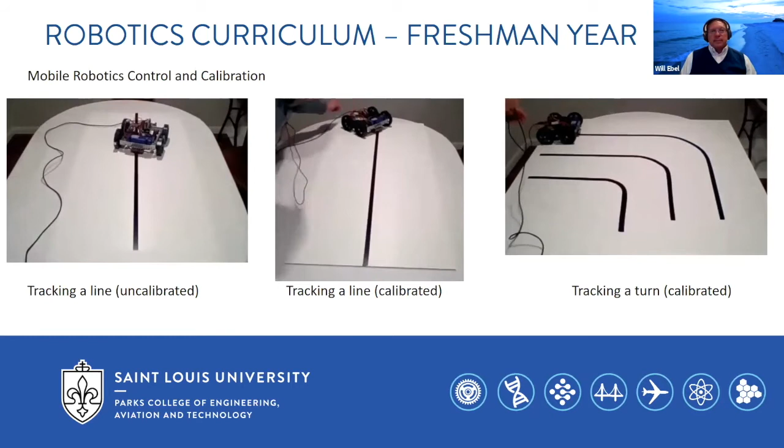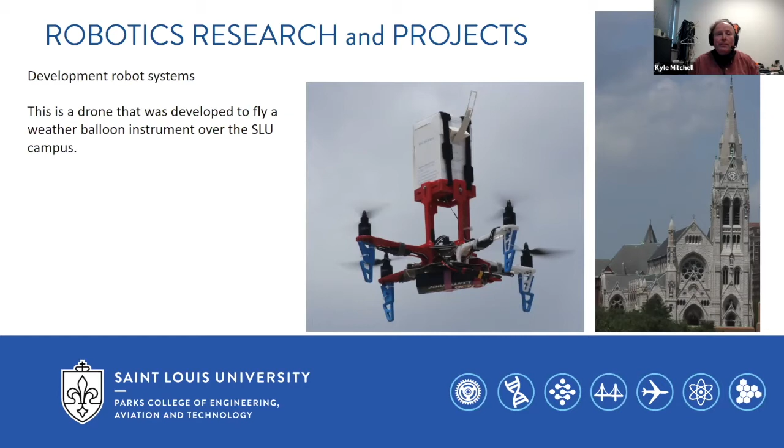We really want this to be something that we can turn loose with middle school and high school students, and other people throughout the country and world can come and experience what it's like to try to both program a stationary arm, but also operate a robot remotely. When you only have a single camera and a single point of view trying to tell you what your robot's doing, perspective gets to be really difficult. And that's something that, as we progress forward in technology and we enter this area of operation where a lot of things are going to be teleoperated, that's going to become something really important.

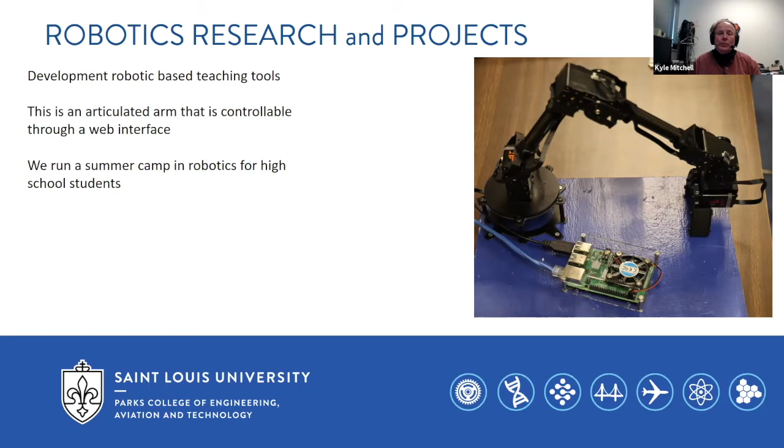Our students participate in a number of robot competitions. So in the electrical and computer engineering departments, we have a competition put on by our National Professional Society, the IEEE, where we build 1 foot by 1 foot cube robots to perform an autonomous task. Those tasks change every year. In the aerospace department, they build flying vehicles, autonomous flying vehicles, to do similar things. So AUVSI is another national organization. This time it's of autonomous vehicles.

These craft typically have to go into a field, find something, and report back something about it. Frequently that something is an injured person, and they have to report back the status of the injured person, or maybe they have to deliver a tracker to where the injured person is, or maybe deliver food and water. There's a number of ways they modify this, but it's all done from an aircraft that you just set down on the line, push the button, and walk away from, and it has to go do its own thing.

You'll notice a theme here around these collegiate projects that's a little bit different than the projects that are done at high school level, and that is this level of complete autonomy. And that's one of the things that you're gonna learn as you go through the computer science, computer engineering, electrical engineering portion of robotics, is how to give robots that level of autonomy where you can push a button and turn them loose and have some trust that they're going to go do what you ask them to do.

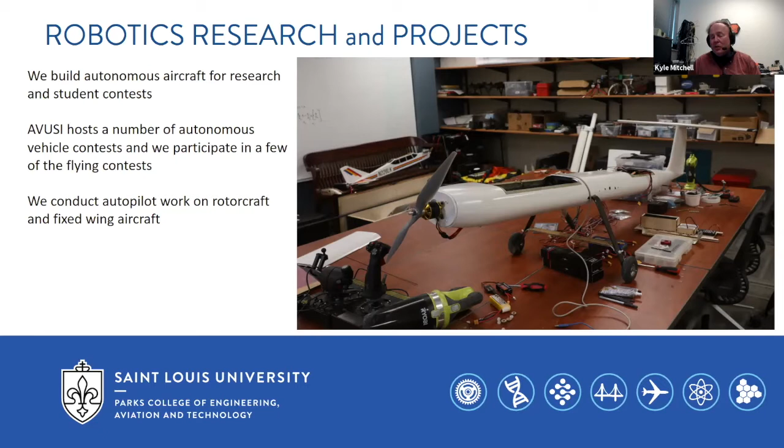So any of you that have flown a drone know that if you damage the propeller, the drone makes a strange noise because the propeller flutters. Well, that fluttering of the propeller makes the whole craft shake at that frequency. But if you damage any part of the substantial structure of this craft, the whole craft will shake a little bit differently. And by measuring that, we can characterize that damage.

And if we know what the damage is, we can program the autopilots to recognize that damage has occurred and do something differently. So a lot of the work that the aerospace people are doing, we're measuring data for them and getting them craft that they can do this vibrational analysis on. They're taking that data and building smarter autopilots.

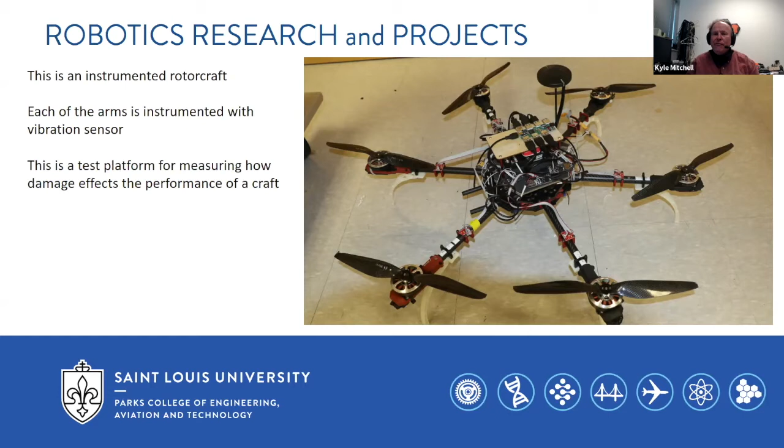So the aerospace people working on these drones, they're figuring out ways so that if they detect that a particular propeller has been damaged enough, they can turn that motor off so that it quits shaking the craft and then still put the craft on the ground in a controlled fashion. In other words, we can damage these crafts and they do not fall out of the sky like you've seen a lot of drones do.

and it has an Arduino processor board on the top, and a motor shield that lies on top of that. And below, although we can't see it, there are some line following sensors, functionally similar to the ones that you saw in the videos earlier on in this presentation. And what the robot needs to do is navigate a course,

and that course involves lines on paper. But the lines also contain symbols, and the symbols have to be detected, and they will tell the robot which direction it needs to turn when it comes to a fork. And the goal is to get the robot to start at some place and end up at some other place, and to correctly read the symbols and to be able to track the lines well.

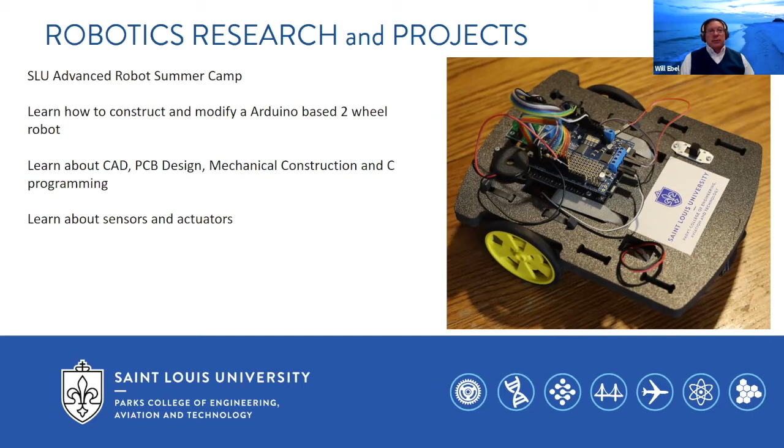We go through a lot of the specific algorithms. We talk about concepts involving programming, how you represent data in the Arduino program, and how you make use of that to achieve the functionality of the project that you're trying to achieve.

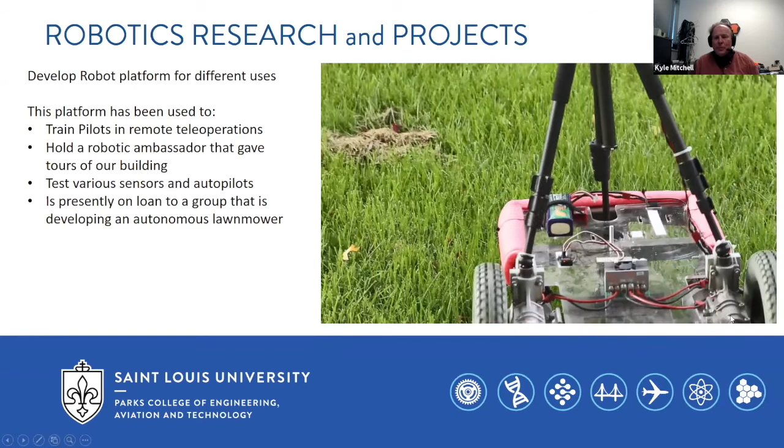So you've seen that we build a lot of robots for use in classrooms and use on tables. We build robots for other purposes also. So this is a particular chassis that we've constructed. We've made use of it in a number of different ways. So there's a robot that hangs out in my lab that for 3 or 4 years gave tours of the building. He was built on top of this platform.

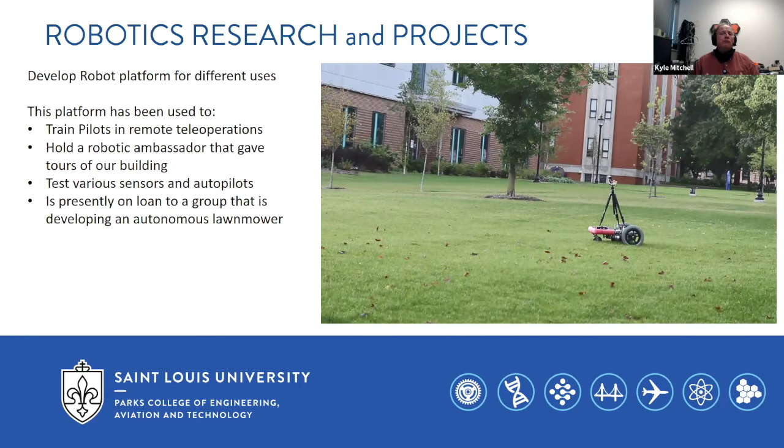This platform has been used so that we can teach pilots how to teleoperate things. So that same thing I talked about with the web-based robotic arm, getting people used to being able to control systems they can't see and touch. We're not too far away from airplanes that are flown remotely, and getting pilots used to the idea that they're going to control an object that they can't see and touch.

We use this particular robot for that. We put it in first-person vision mode and let them teleoperate it. We basically locked them in a closet and said, drive this around the hallways.

Right now, this robot's on loan to a senior design group that's using it as a starting point for developing an autonomous lawnmower. So something that we could just turn loose in the grass, tell it to stay within this box, and it would do something similar to what your Roomba does, except it'd do it for your grass outside. So we build these larger robots. We test them, or we use them for much bigger projects and a little bit more research type activity.

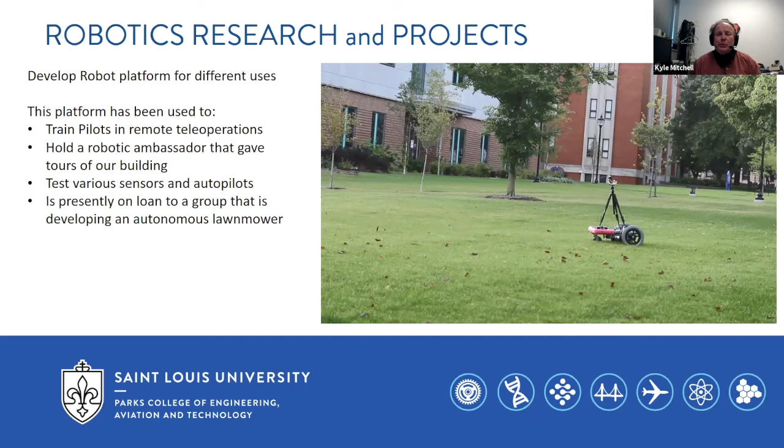So when you design a new drone, when you design a new autopilot, that first time you take it off, it may or may not do what you want it to do, and we have to be somewhat safe about it. So we put them inside these cages to let them fly around. The things we're studying are exactly what I talked about before. So how do we study drones in such a way that we can determine that they've been damaged? And how do we build autopilots that can do things when they detect that damage?

We also do some other more interesting things. So we're using Oculus Rift, which are VR goggles, to make it so that the people that are flying these drones, rather than staring at a computer screen that looks like an airport radar or something like that, they have a pair of Oculus Rift on so that they can actually see a virtual environment. We can project out the data that the USGS and the NGA have about the landscape around where the drone is, so that the pilot actually has a realistic view of where the drone is flying.

They can reach into the virtual environment and manipulate the drone, and the controls that you use with your hands are very configurable. So sometimes we just have them be drop-down box type things. Sometimes we actually have them be flight stick type things. But they're things that you just manipulate out in free space while you're playing in a virtual environment. But the cool thing is that it's not a video game where you're just playing something virtual. The craft that people control in our environment are actually in this cage flying around.

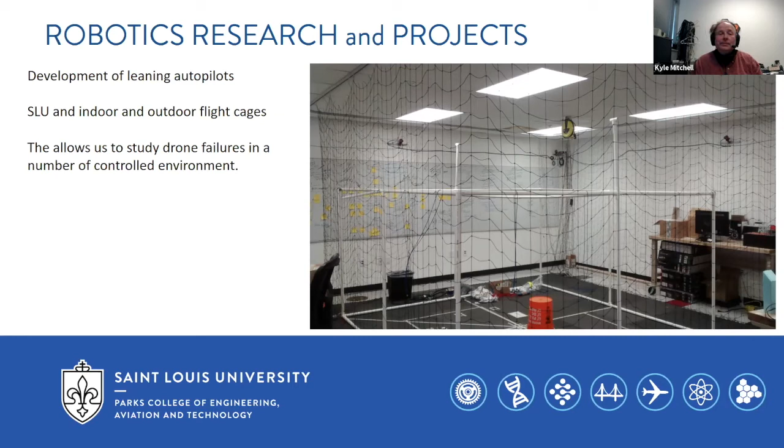We have a satellite lab that's a completely project-driven or completely student-driven project lab. So this is an extracurricular activity, completely undergraduate, student-driven. We get to the point where we can launch satellites about once every 4 years. Since I came to SLU in 2002, we've launched 3 satellites. 2 of them are in orbit and 1 of them is on the bottom of the Pacific Ocean.

So one of the differences about some of the robots that we deal with, especially the satellites, is that these robots, not only do they have to be autonomous, but we have to be able to put them in a box, ship them to California, let them sit on a shelf for 6 months, get on the end of a rocket and go to space, and then turn on and operate on their own. And we never get to touch them again. So these systems are built very differently.

And the study and the testing that goes into these is pretty rigorous, because whether you're in space or you're building something to go inside the human body, or you're building something that'll be in some other dangerous environment, a deep cave, a nuclear power plant, there's a number of dangerous environments we build stuff for. You don't get to go touch and repair these things. They have to just work. And we teach students how to do that type of testing.

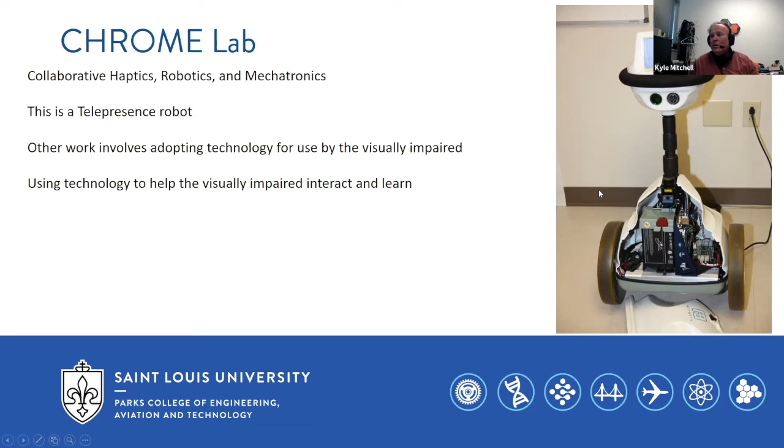This robot, you put a patient inside of a live X-ray or MRI machine. This robot watches the live medical imagery and actually conducts surgery without intervention from the doctor. So this is a fully autonomous surgical robot. Right now, the surgery they're trying to get to is the placing of pins. So if you have a broken bone, this robot can put a pin in your bone more accurately than a doctor can. The doctor kind of tells the robot where it needs to go, and then the robot puts it right there.

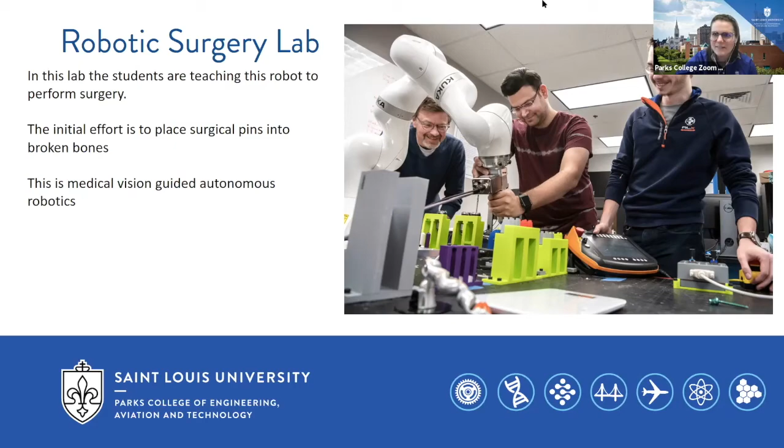But I'm going to get us started because, based on your presentation, there's so much opportunity for collaboration when it comes to robotics. So you mentioned applications within meteorology, within aerospace engineering, our aviation programs, and then the medical field. So when students come into the program, do they need to have that kind of mindset already in place, or are there research projects that they can just get involved in, if maybe they're more medically leaning, maybe they're more aviation leaning? What does that look like and how do they get involved?

So we try to support both of those ideas. We've had students that come in the door and have a very focused intent on where they want to be and end up. And those people get supported through custom projects, through the fact that we have open spaces for student projects. Several of them have gone on to start businesses around the projects they bring in once they leave SLU. So that is one thing you can do. You can show up with something that you are really wanting to do. Now, if it's a great big thing you really want to do, we might have to talk about how we fund it.